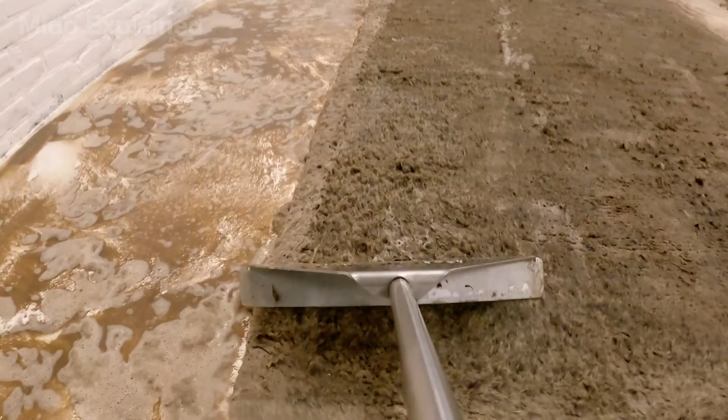Would you dare drink carpet cleaner, washing machine water, or even your own urine? Sounds disgusting, right? But the truth is, millions of people in the world's wealthiest countries are drinking toilet water every day without knowing it. This isn't a joke.

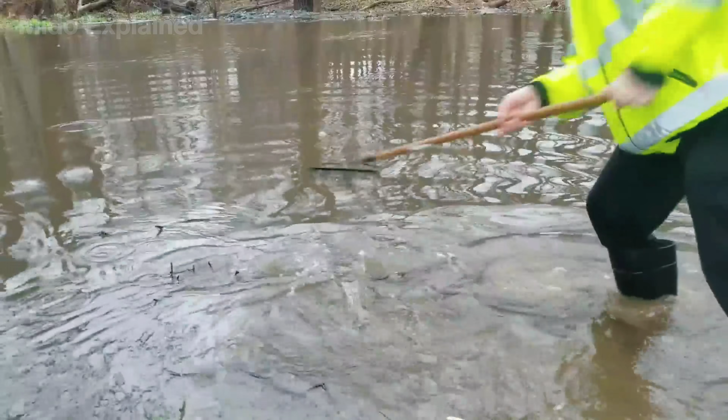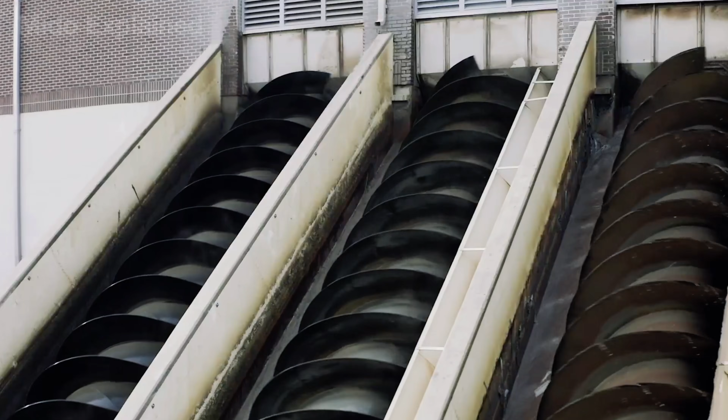From Singapore to major US states, the black, foul-smelling wastewater from millions of households' toilets is being pumped back, filtered through ultrafiltration membranes, and subjected to high-intensity UV rays. The result is ultra-pure water, hundreds of times cleaner than regular tap water.

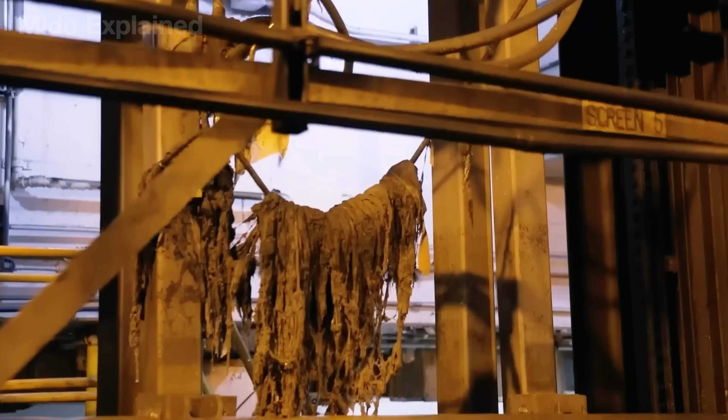Is this technology truly safe, or are we simply inviting disease into our bodies? Watch this entire video to find out where the water you'll be drinking in the future is actually coming from.

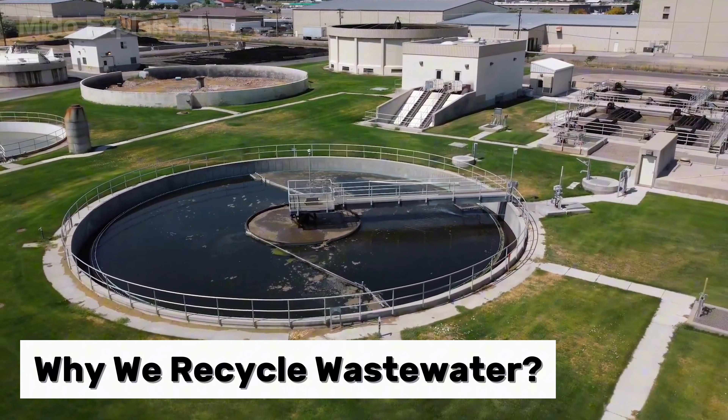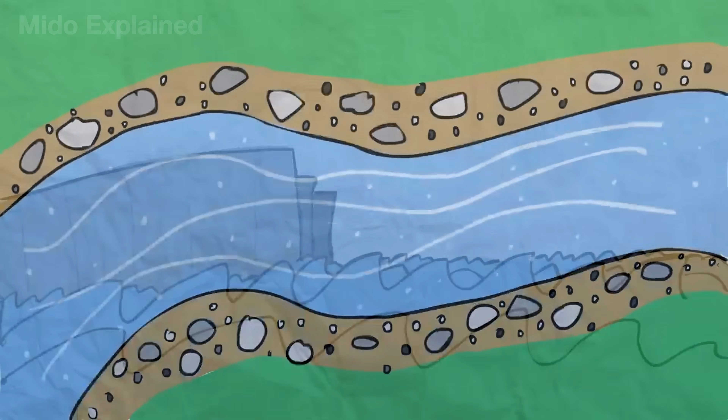Water recycling technology wasn't developed because people wanted to create a new water source, but because many places are gradually depleting their existing water sources. In many large cities like Mexico City or Jakarta, excessive groundwater extraction over decades has caused the land to subside annually. Meanwhile, climate change and prolonged droughts are making it increasingly difficult for rivers and reservoirs to meet the needs of a constantly growing population.

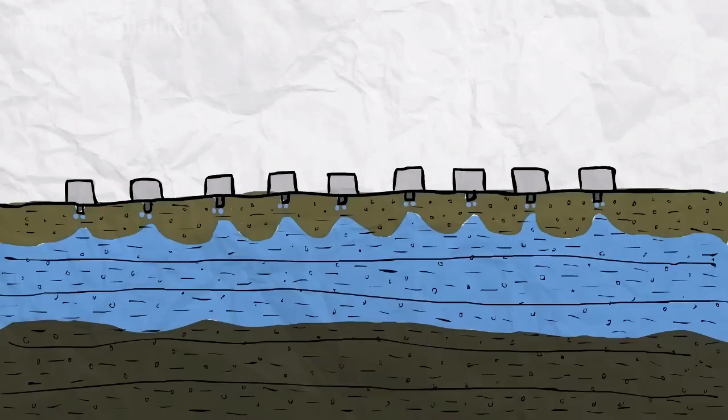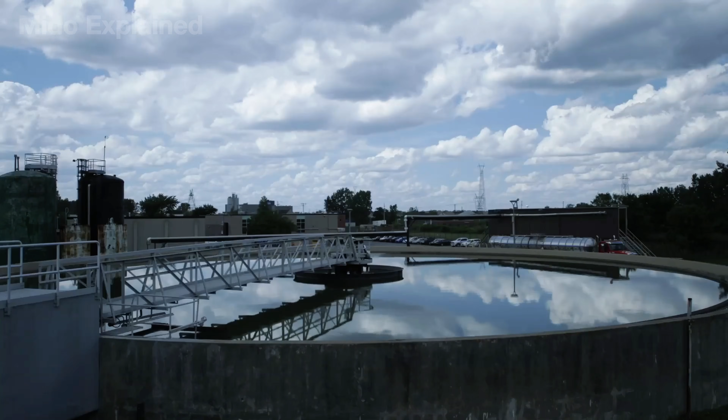That's why many countries are beginning to view wastewater as a resource rather than a type of waste to be disposed of. Singapore is a prime example. Due to its almost insufficient natural freshwater resources, the country has invested heavily in recycling technology to ensure water security. In the US, the water recycling system in Orange County currently processes nearly 500 million liters of water per day, replenishing groundwater aquifers and providing a stable water supply for hundreds of thousands of people.

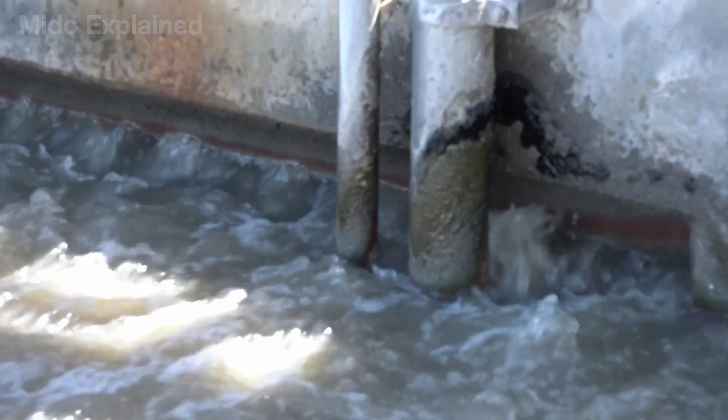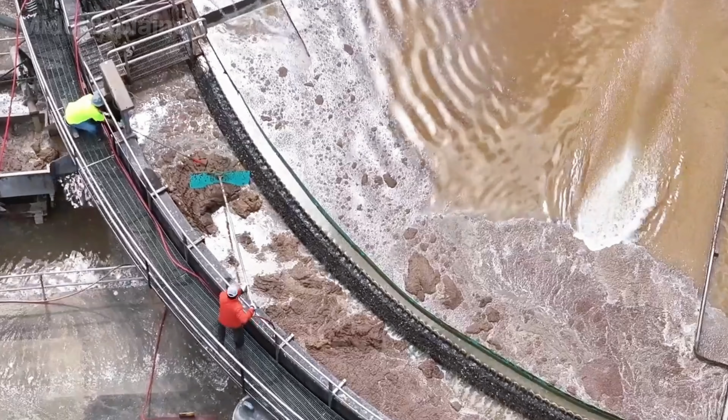However, this technology also has limitations. Not all types of wastewater can be treated to become drinking water. In particular, industrial wastewater, containing many toxic chemicals and heavy metals, often needs to be treated separately before it can enter advanced filtration processes.

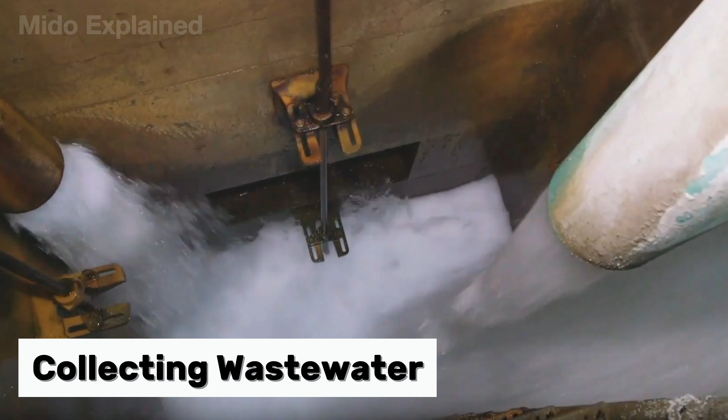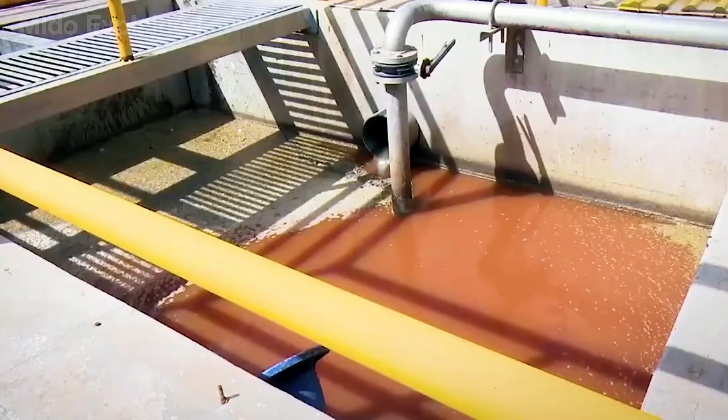Every water recycling journey begins with a source most of us want to avoid: wastewater. Each time we flush the toilet, shower, wash clothes, or wash dishes, the water doesn't disappear. It begins its journey to a treatment plant.

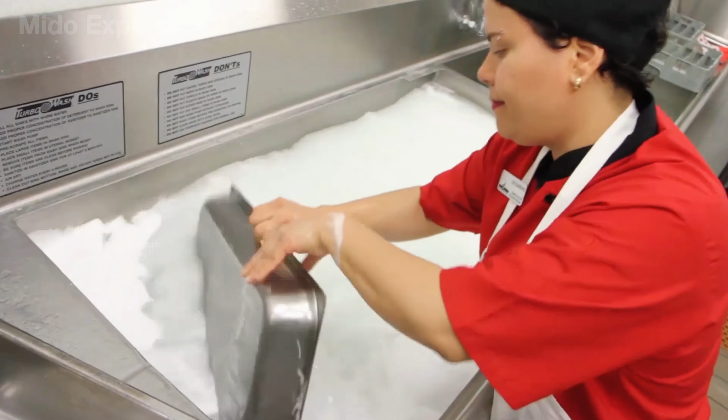Not only that, the system also receives wastewater from hospitals, schools, restaurants, hotels, and numerous manufacturing facilities. All of this mixes into a massive flow, carrying all sorts of impurities, from toilet paper, hair, food scraps, and countless dissolved organic substances. The scale of this water is far greater than many imagine.

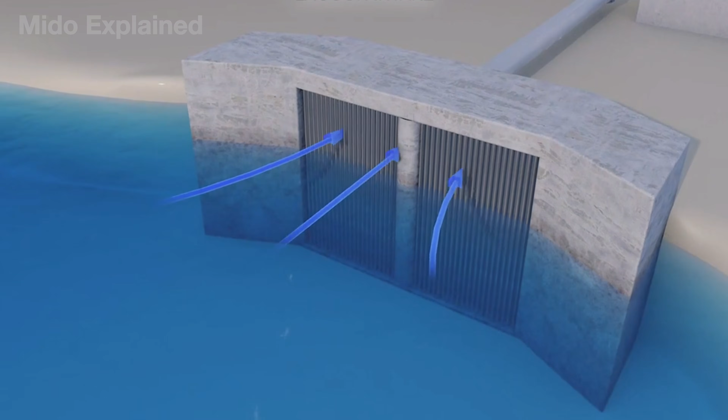A single large-scale wastewater treatment plant can receive tens to hundreds of millions of gallons of water per day. This flow continues 24 hours a day without interruption. However, despite appearing as a worthless mixture, engineers view it as a raw material for creating the clean water we drink every day.

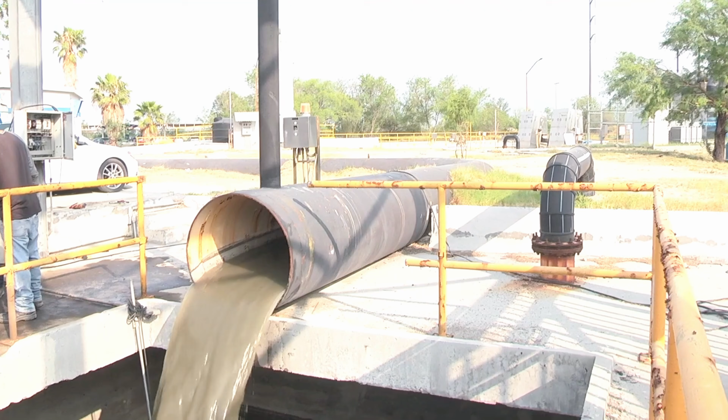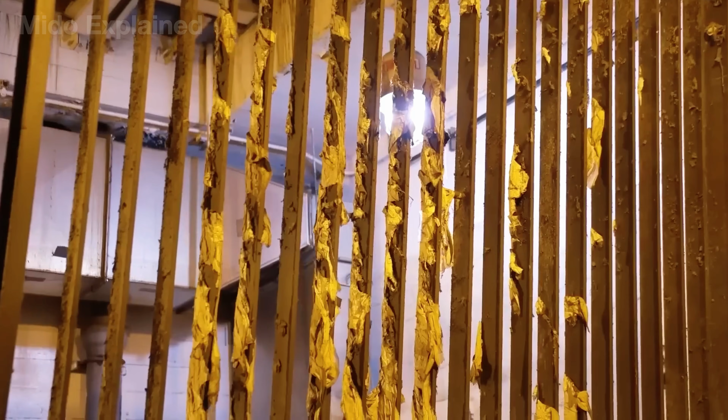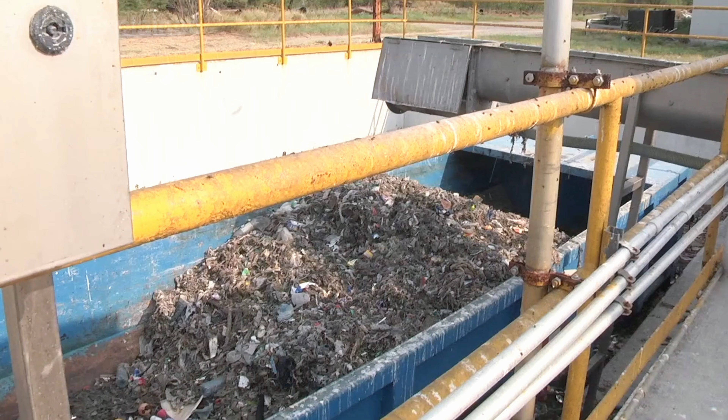Upon arriving at the plant, wastewater cannot go directly to the sophisticated treatment stages. The first step is to remove the largest impurities to protect the entire process. The water passes through steel screens, where toilet paper, plastic bags, rags, twigs, and various other debris are retained. In large-scale plants, this system can collect over 20 tons of waste per day, preventing it from clogging pipes or damaging pumps.

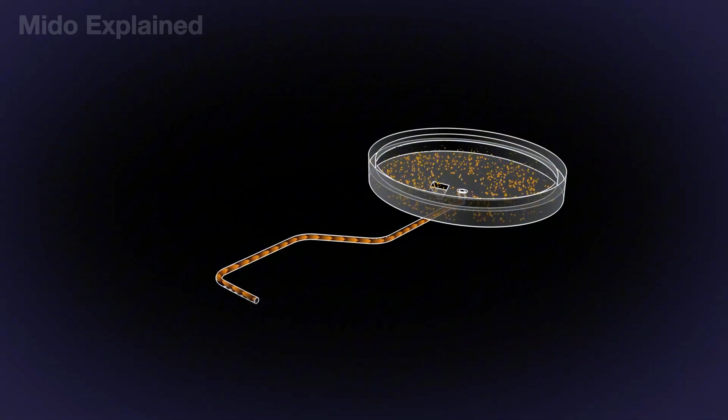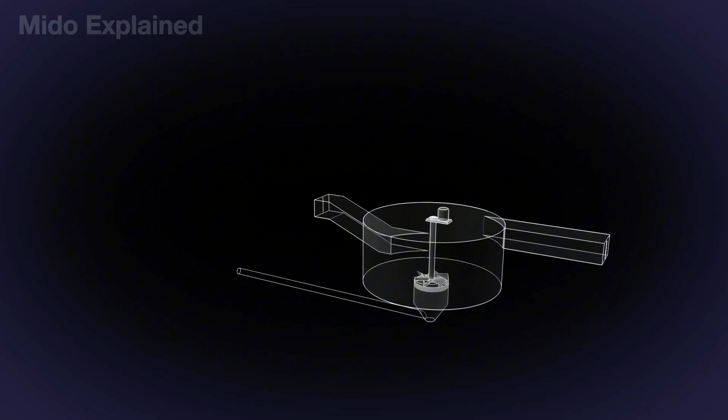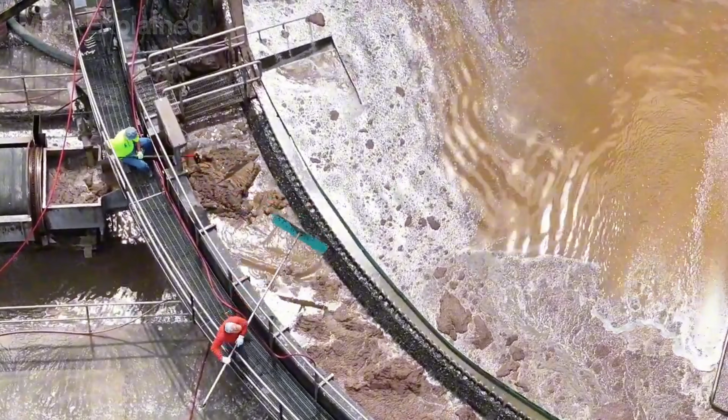After removing coarse debris, the water continues into a sand separation tank. Here, the flow rate is reduced just enough for sand, gravel, glass fragments, and heavy inorganic particles to settle to the bottom, while the water continues to move forward. The final stage of pretreatment is oil and grease separation. Due to their lighter weight compared to water, oil and grease float to the surface and are collected by automatic scrapers. After these first 3 steps, the water has had most of the large impurities removed and is ready to enter the more complex biological treatment stage.

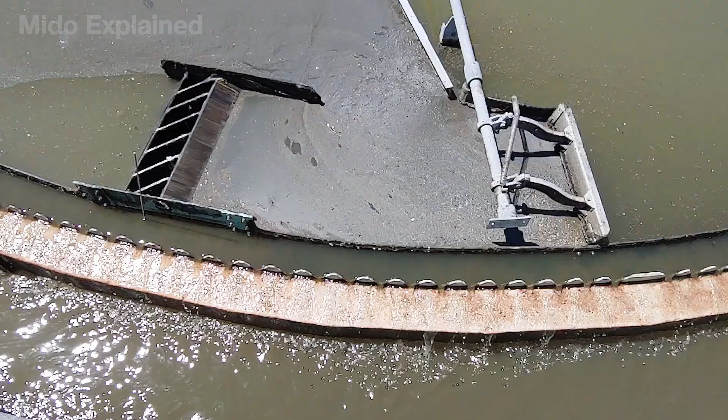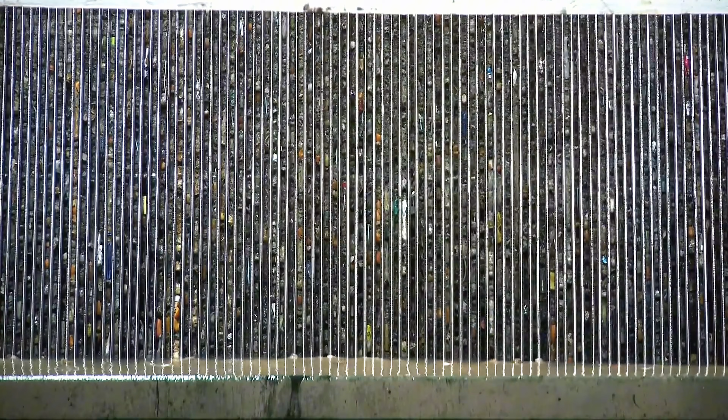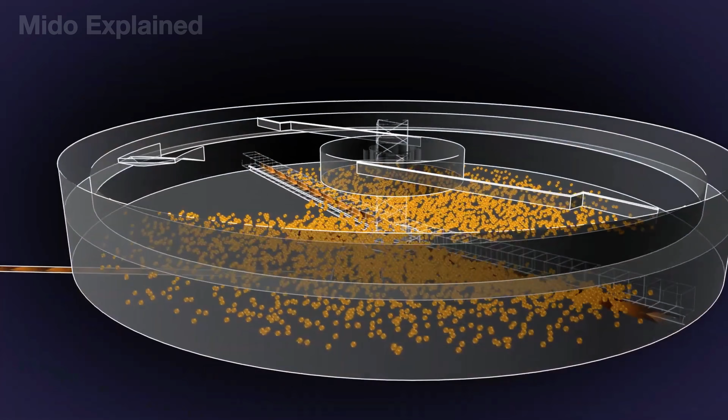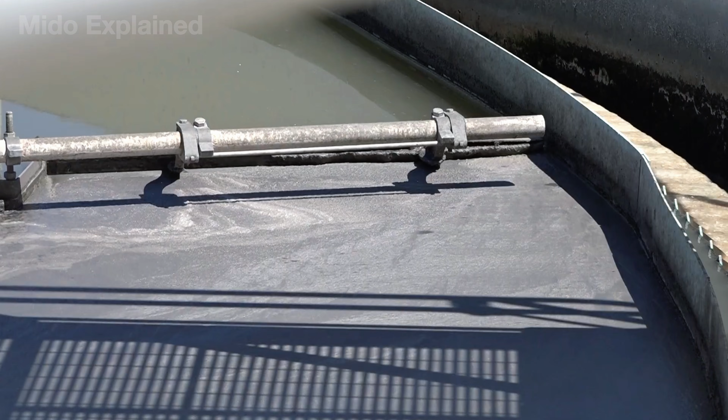After the large impurities have been removed, the wastewater still contains countless small suspended organic particles that the trash screens cannot retain. To treat them, the water is directed into huge primary settling tanks and held for about 2 hours. During this time, the heavier organic particles will slowly sink to the bottom, forming a thick layer of sludge called primary sludge. Through this natural settling process alone, the plant can remove about 50% of the suspended solids and 25% of the organic matter in the wastewater.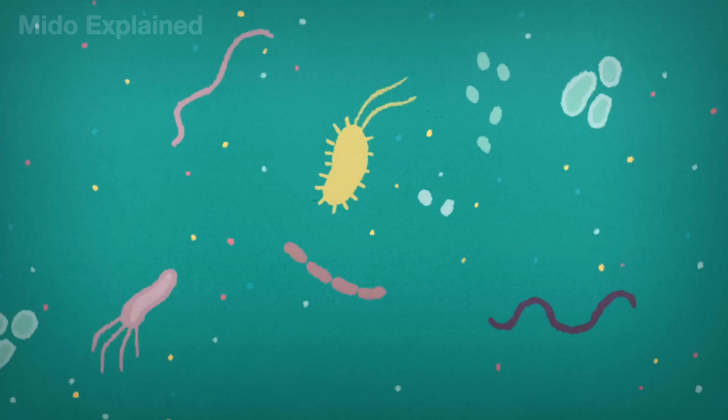The sludge at the bottom is then pumped to a separate line for further processing, while the water above, although clearer, still contains billions of bacteria and dissolved organic matter.

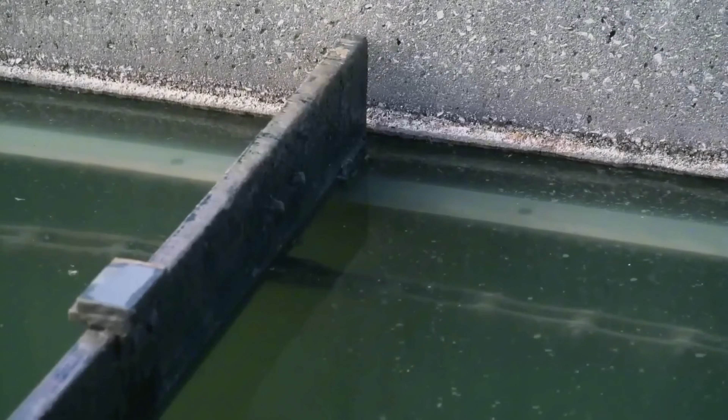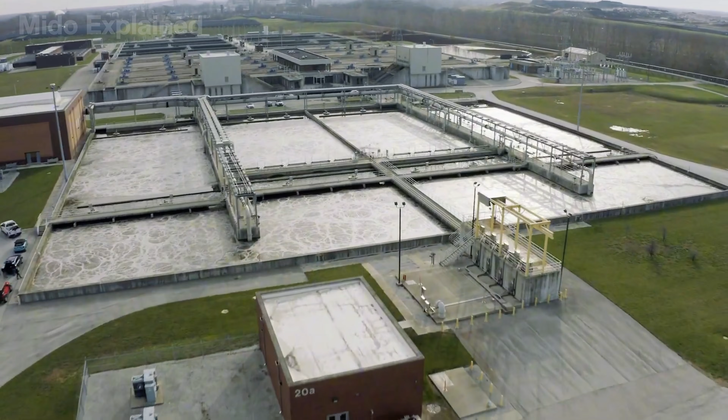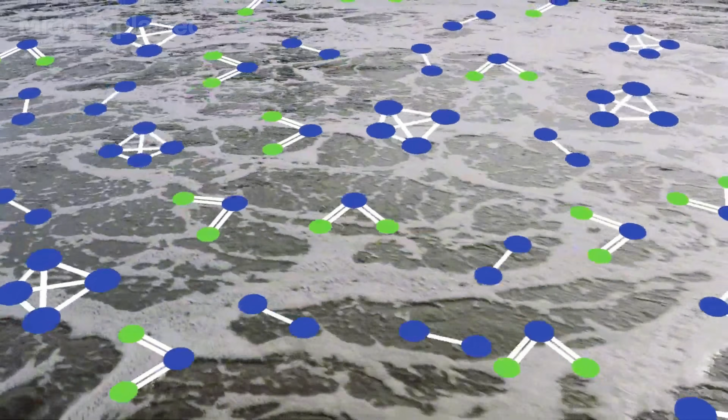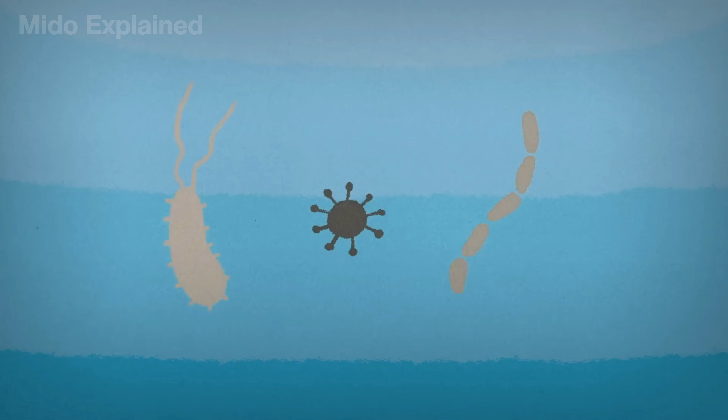After most of the solids have been removed, the wastewater still contains a large amount of dissolved organic matter invisible to the naked eye. To treat this, the water is fed into aeration tanks, where billions of beneficial microorganisms are waiting. Air is continuously pumped to the bottom of the tank to provide oxygen, creating conditions for the microorganisms to thrive. They use the organic matter as a food source, breaking it down into water, carbon dioxide, and new biomass. In just a few hours, this process can remove 85 to 95% of the remaining organic matter in the water.

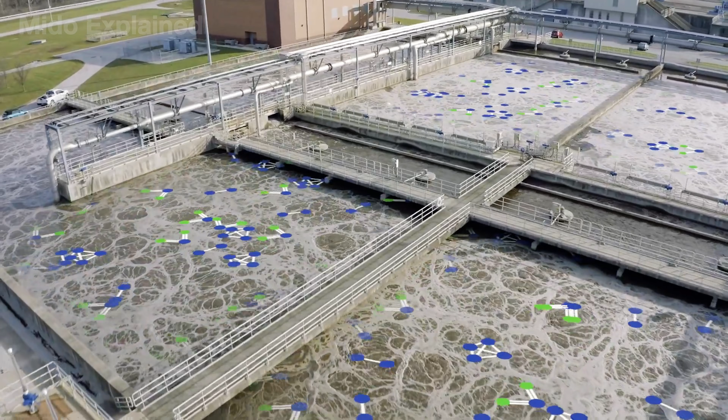As the food source gradually runs out, the microorganisms clump together into large sludge flocks, which easily settle in the next tank. At this point, the water is much clearer, but it still contains bacteria, viruses, heavy metals, and tiny dissolved substances.

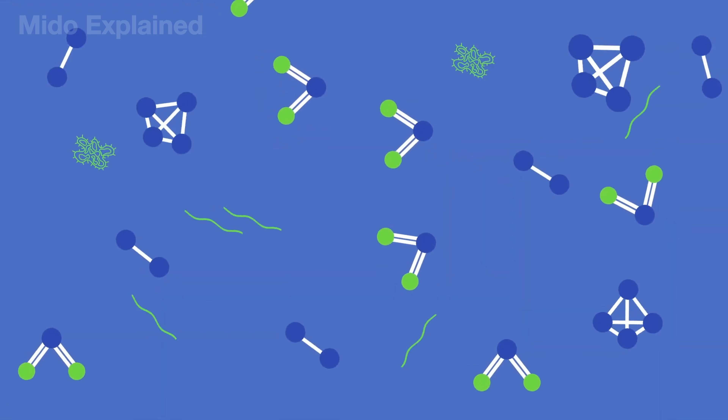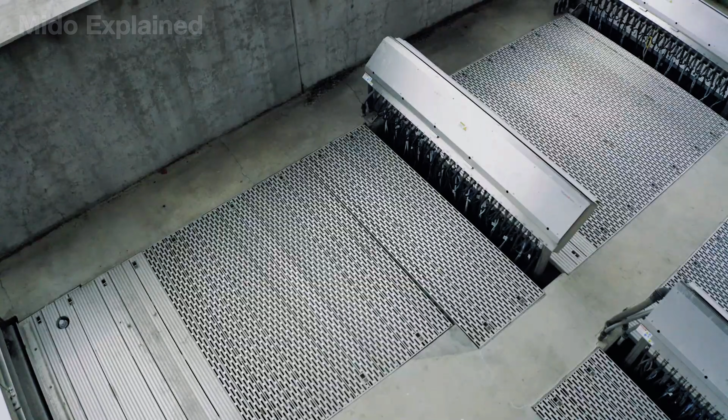That's why it needs to go through the membrane filtration and reverse osmosis stages. First, the water is passed through ultrafine membranes with pores of only about 0.1 micron, small enough to retain most bacteria, parasites, and remaining tiny particles.

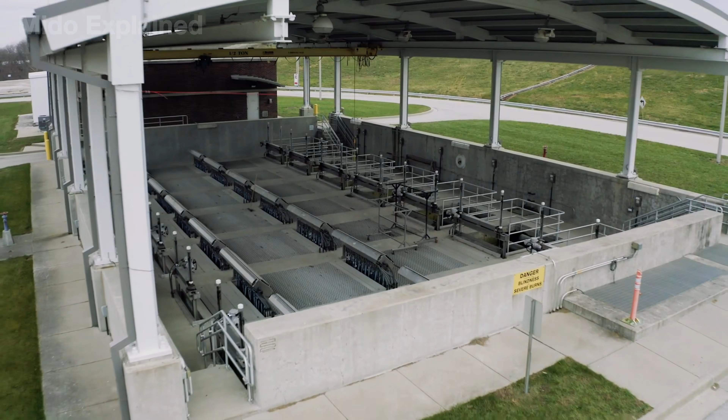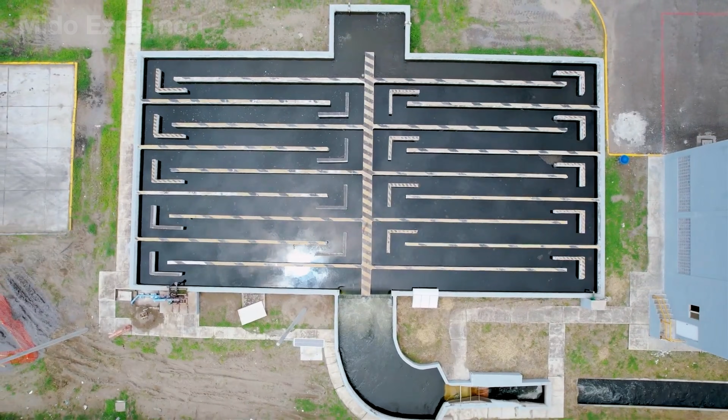Then comes the most important step, reverse osmosis. Here, water is forced under pressure up to 250 psi through a special semi-permeable membrane. This membrane allows almost only water molecules to pass through, while salts, heavy metals, viruses, microplastics, drug residues, and many other dissolved pollutants are retained.

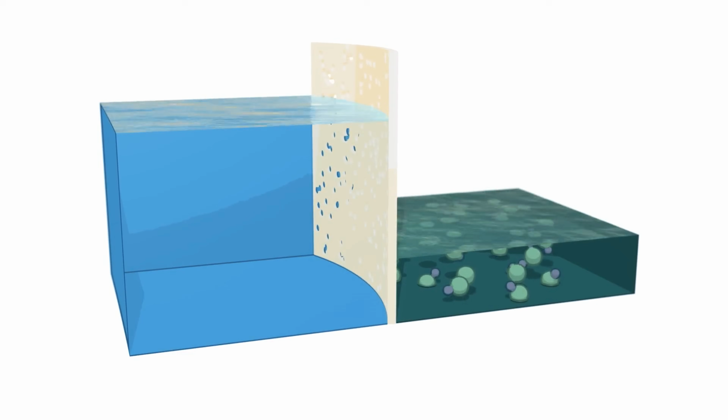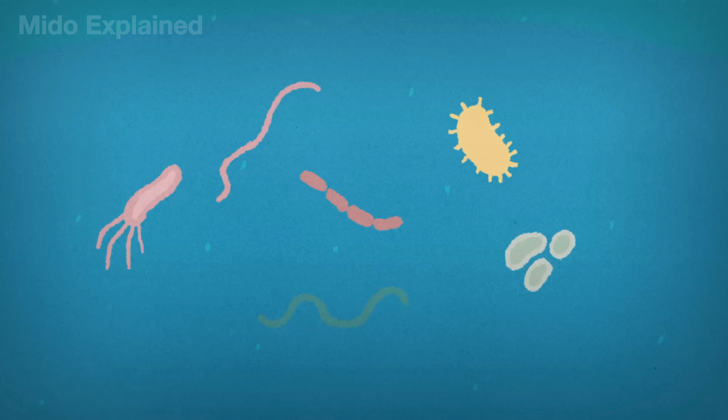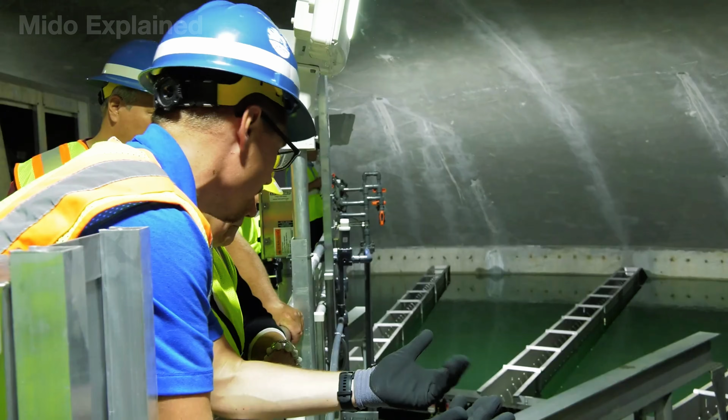Although the water has achieved a very high level of purity after the RO system, it is not yet ready for immediate use. First, the water undergoes a final disinfection using ultraviolet light, ozone, or the addition of a very small amount of chlorine to completely eliminate any remaining microorganisms and ensure the water remains safe during distribution. Next, the system adds a small amount of minerals such as calcium and magnesium and adjusts the pH to give the water a more natural and stable taste.

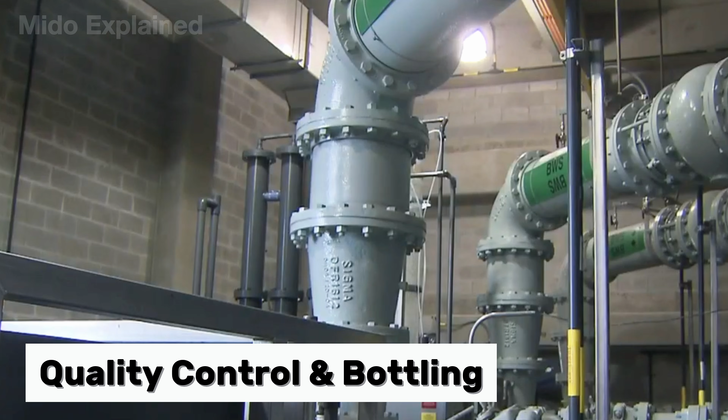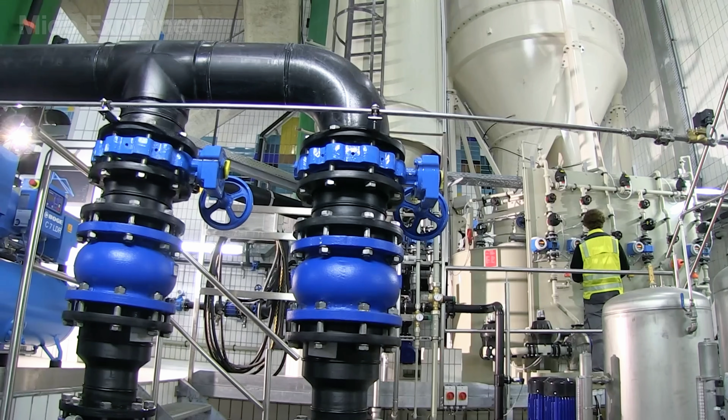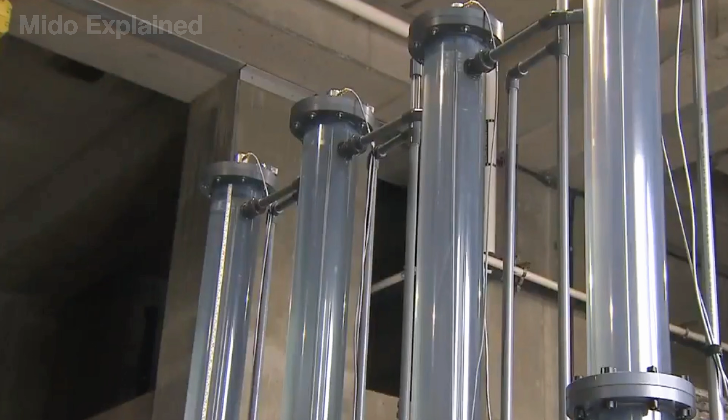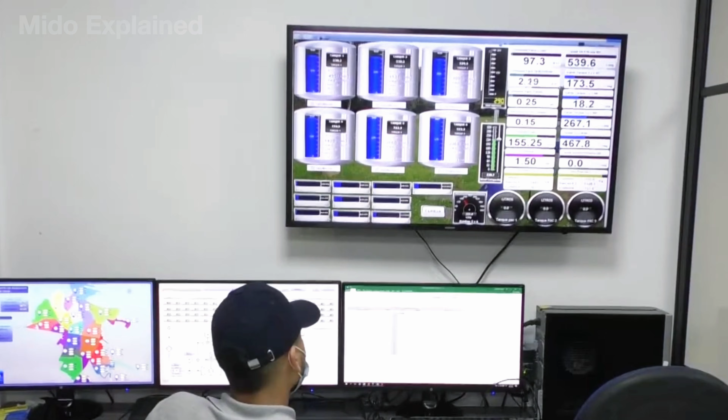After completing these steps, the water is tested against several rigorous standards before officially becoming a source of clean water for human consumption. A series of automated sensors continuously monitor parameters such as turbidity, pH, mineral content, disinfectant residue, and total dissolved organic matter. Simultaneously, water samples are periodically taken for laboratory analysis to detect bacteria, viruses, heavy metals, and hundreds of other indicators according to drinking water standards. Only when all results meet the requirements is the water allowed to leave the plant for distribution or bottling.

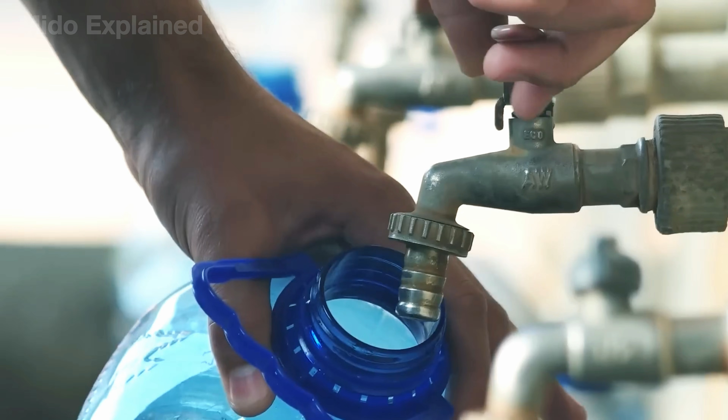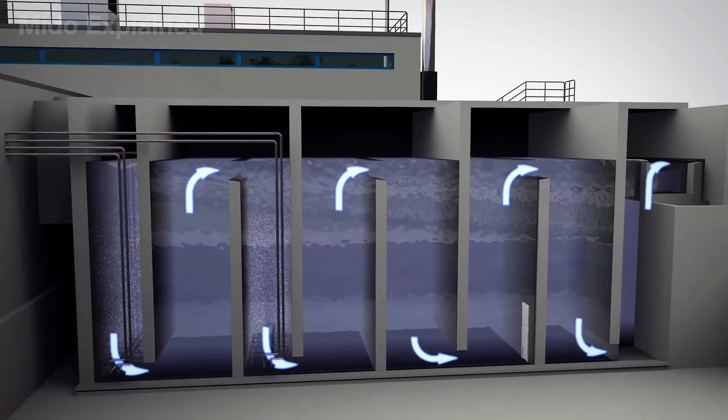So now, would you dare to drink it? If the answer is no, you might be surprised to learn that millions of people have been drinking this water for a long time without knowing it. After passing hundreds of rigorous tests, what was once wastewater now fully meets the standards for drinking water.

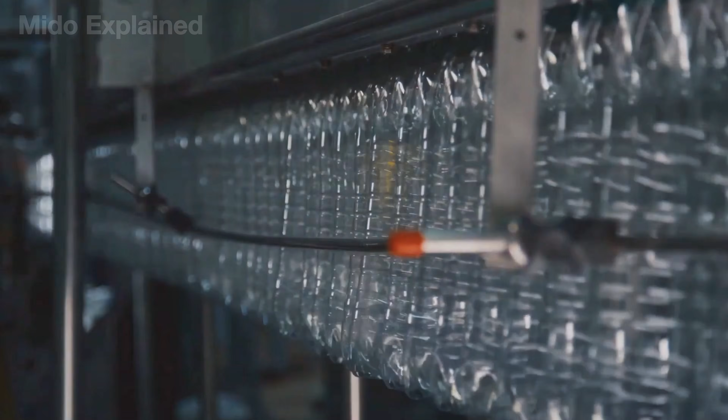And to become a complete product, before it can hold even a single drop of water, the bottle itself must be created. Instead of shipping bulky empty bottles, most factories import compact PET preforms, resembling test tubes with pre-shaped necks.

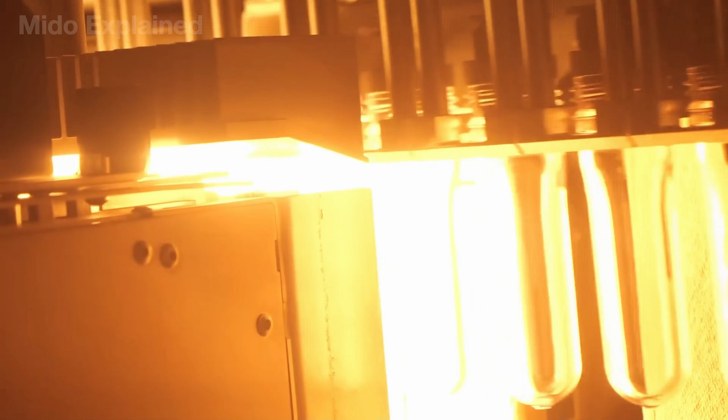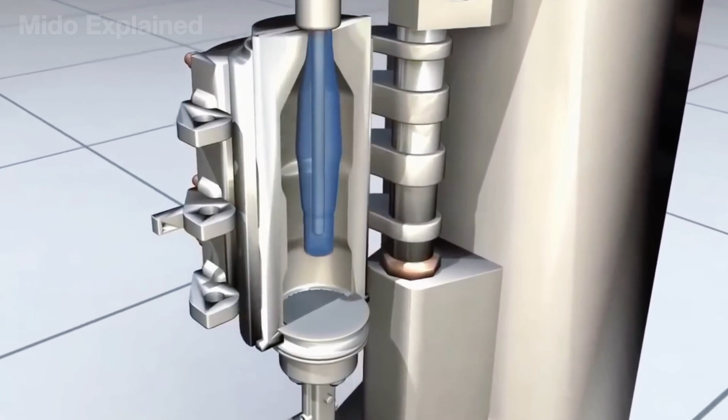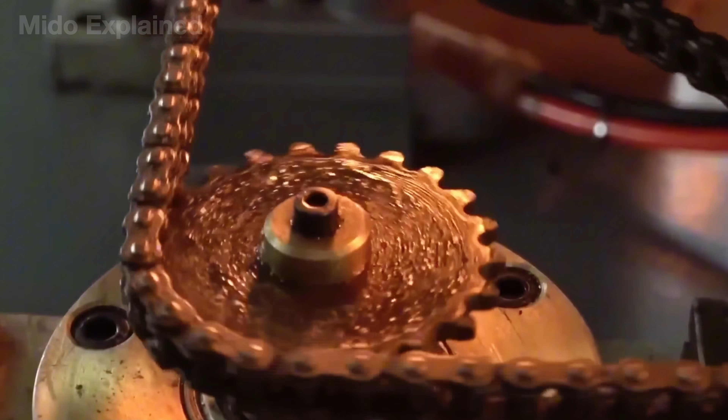These preforms then pass through a heating system at around 250 degrees Fahrenheit, softening the plastic and making it pliable enough for molding. Immediately afterward, each preform is placed into a mold, where a pull rod stretches it vertically, while compressed air at pressures up to 580 pounds per square inch simultaneously blows the preform against the mold walls. In just seconds, a small plastic preform is transformed into a complete bottle with precise details, from the body and bottom to the reinforcing ribs.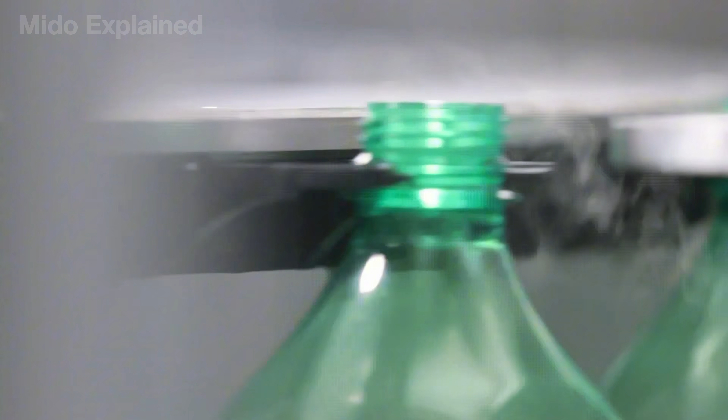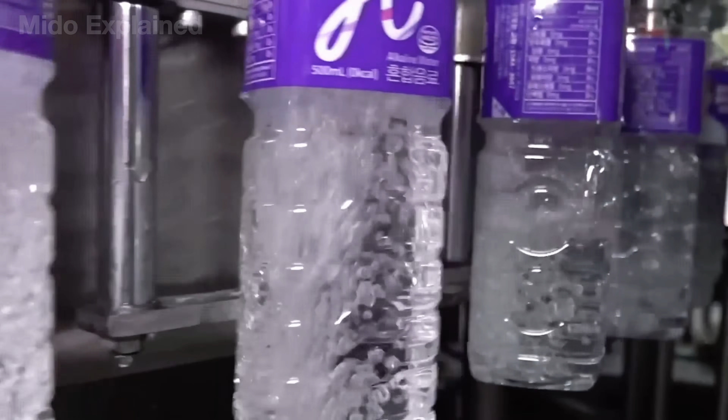The newly formed bottles then move directly to the automated filling line. First, they are cleaned with sterile air or washed with treated water to remove any remaining dirt. Then, the water is filled into individual bottles with precisely controlled volumes and immediately sealed to prevent recontamination from the external environment.

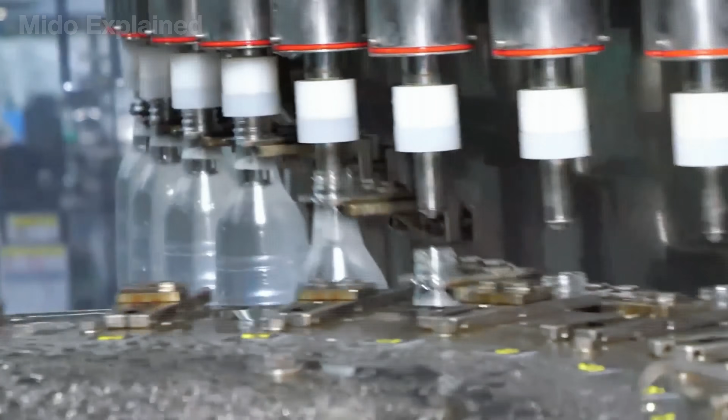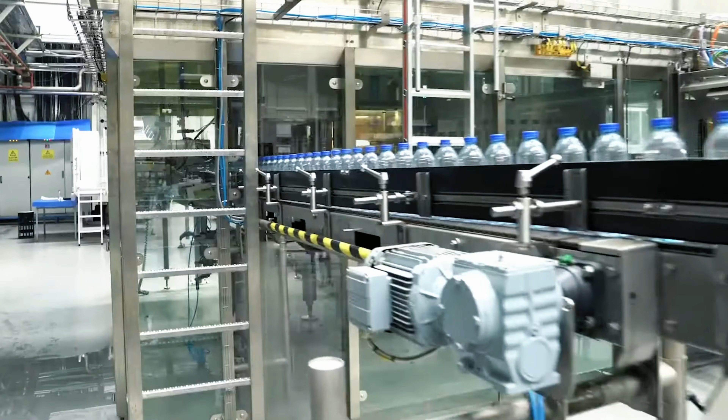Next, an automated system labels the bottles, printing the production date and batch code, before high-speed cameras inspect each bottle for insufficient water levels, loosely capped caps, or any packaging defects. Only bottles that pass all the final checks are packed into cartons, placed on pallets, and shipped to distribution centers.

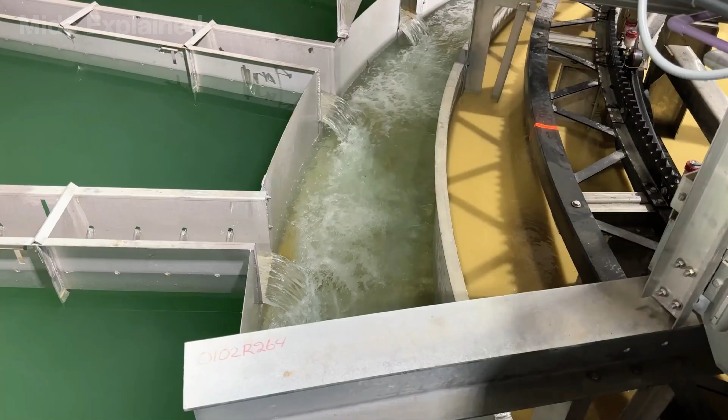Just days later, they may appear on supermarket shelves or in your refrigerator, even though just hours before, they were wastewater that most people thought would never be drinkable.

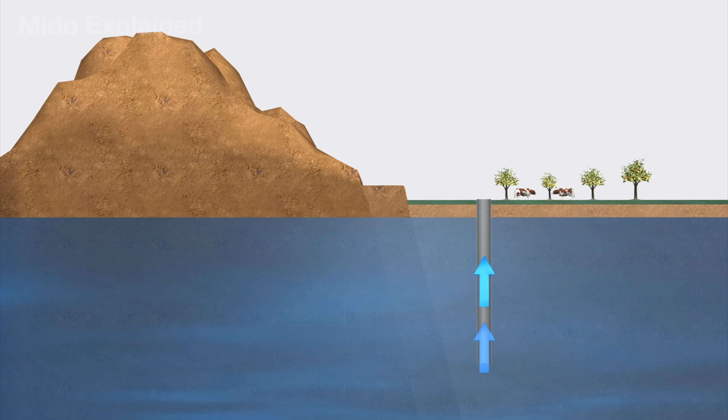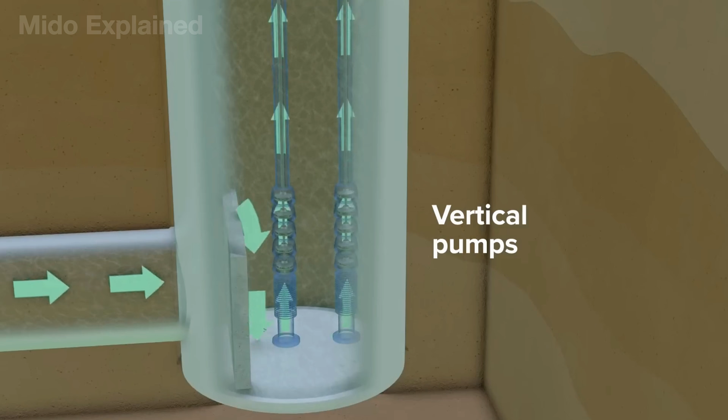From a murky, seemingly disposable wastewater stream, through a series of processes ranging from biological treatment, membrane filtration, reverse osmosis, to disinfection and rigorous testing, it has become a source of water safe enough for daily human consumption. Amazingly, the biggest hurdle for this technology is no longer its ability to purify water, but rather changing how we perceive it. What about you?